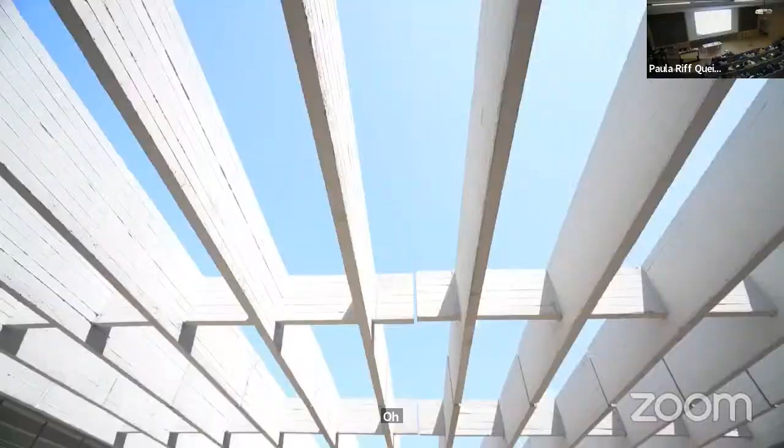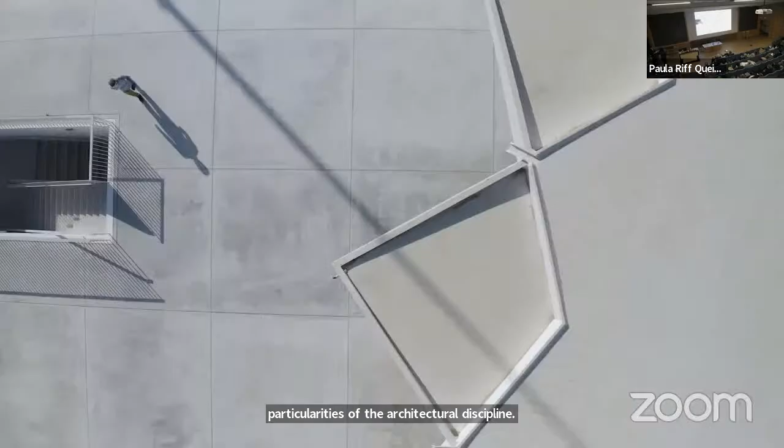What I like about the Aga Khan Award is that it looks at the particularities of the architectural discipline: its formal inventiveness, its spatial dexterity, and its material attentiveness. It's the only award in the world that recognizes architecture is part of a larger net of activities trying to solve the problems of the built environment.

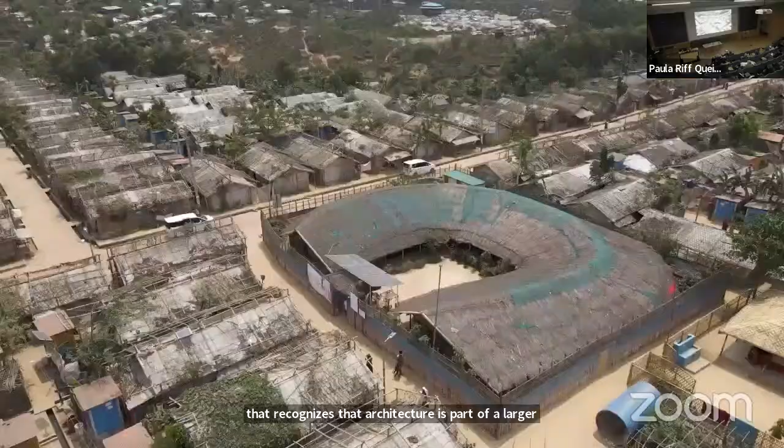It's very important to focus on the people. It is our duty to pay attention to the very philosophy of the Aga Khan Foundation and the Aga Khan Prize for Architecture. What makes it significant is that it's the only award that talks about architecture and development. That's what makes it unique.

The efforts that are made to visit every single shortlisted project, to photograph it, to meet with all the different actors, to acknowledge the complexity of architectural projects, the number of actors involved, and to really see the effect architecture can have. On-site reviews give you a clear understanding of the project. They give you insight into the fiber of the project, what happens under the engine, as it were, rather than what you see on the facades.

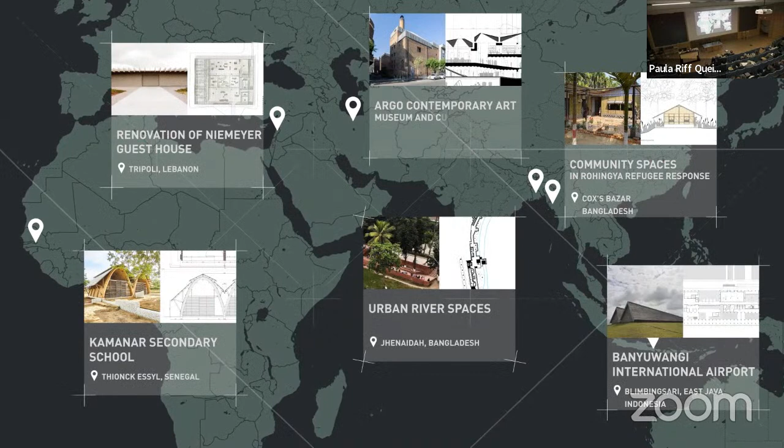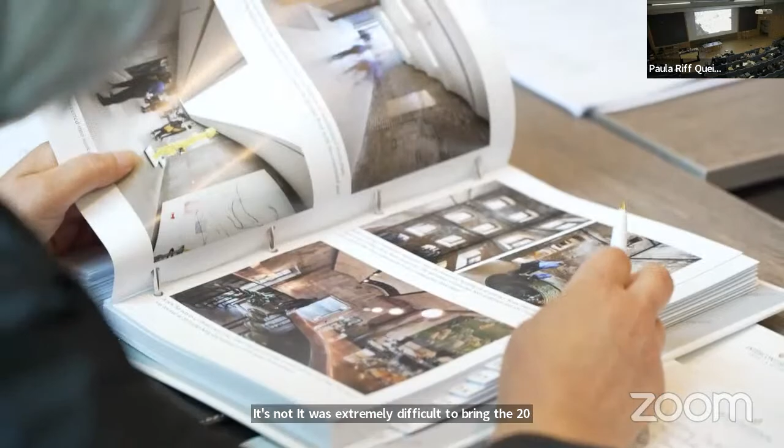It was extremely difficult to bring the 20 shortlisted projects down to 6. All of the 6 have different values. In every cycle, we see different approaches, different selection criteria from the juries.

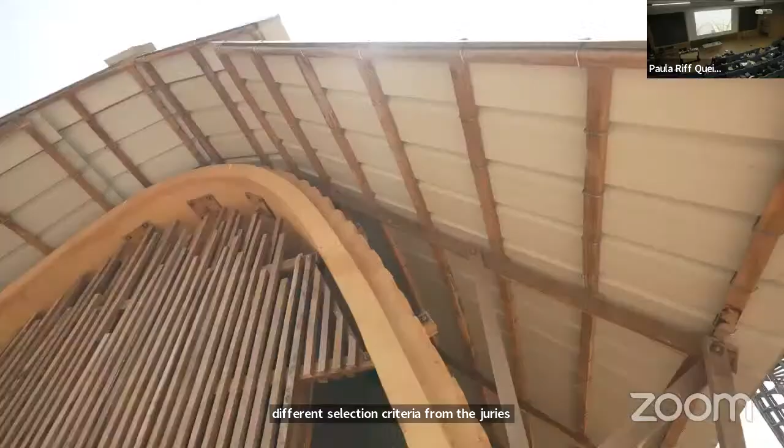It's very interesting and impressive to see how these projects really take into account the daily life, the environment, the existing context. What characterizes the winners of this year's award is people-centered, transformative, and inspirational qualities.

It's more than an award, actually. It's like a fantastic open library that allows us to travel through time, almost like a journey through time, that allows an observatory of the different ways architecture could deal with sometimes very hard geopolitical situations.

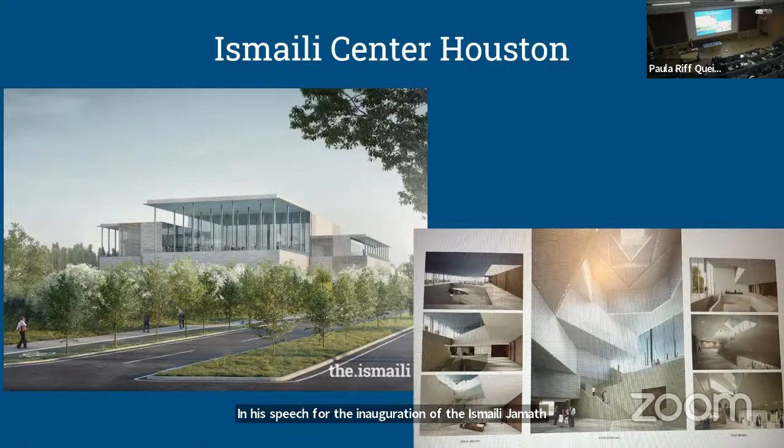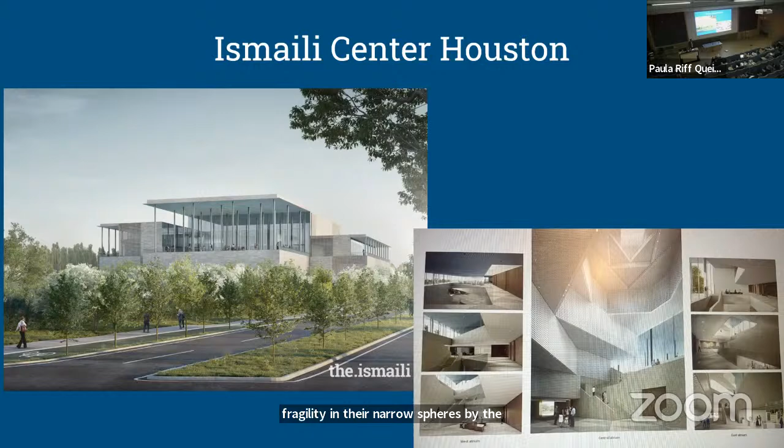In his speech for the inauguration of the Ismaili Jamaat Khana and Center in Houston in 2002, His Highness the Aga Khan said: "The center will be a place of peace, humility, reflection, and prayer. It will be a place of search and enlightenment. It will be a center which will seek to bond men and women of this pluralistic country to replace their fragility in their narrow spheres by the strength of civil society, bound together by a common destiny."

It is already a symbol of the hopes of people who live through change and turbulence and have ultimately found security and opportunity here in the United States. In this time of geopolitical uncertainty, conversations like today's are important, where we focus on what binds us together versus what keeps us apart.

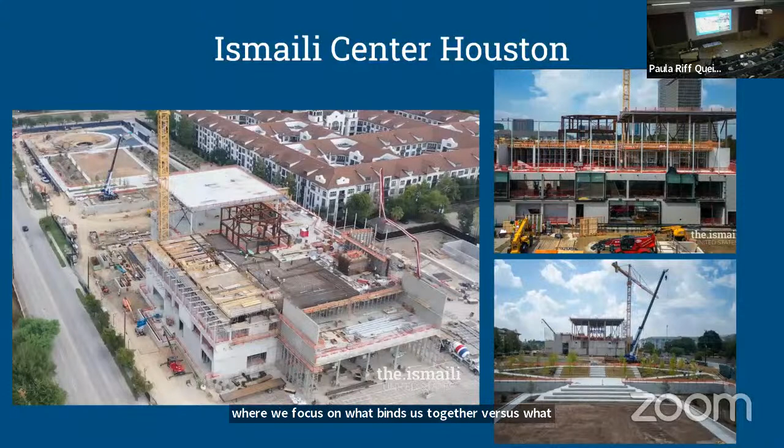Architecture does just that, and I look forward to hearing our distinguished guests reflect on the importance of the Aga Khan Award for Architecture. Thank you.

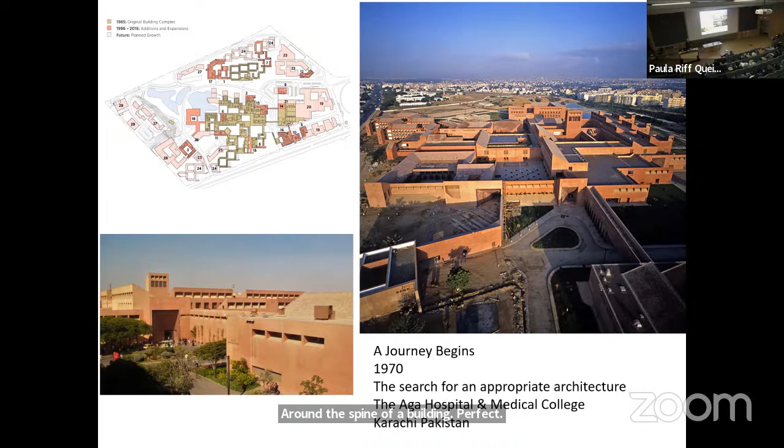So he sets up an award—well, he actually sets up to design this building. In 1970, this project is commissioned to Payette Associates, who then, 40 years later, are still involved in this hospital, which has grown and grown. You can see the master plan of it, and what it is essentially is developing a kit of parts around the spine of a building, and a series of courtyards. These were interpreting, if you like, certain kinds of architecture. I actually joined this project in 1972—this was my first project just after I'd become an architect, so I got involved at a very early stage in England, where it was being designed, and learned a great deal about architecture through my involvement in this piece.

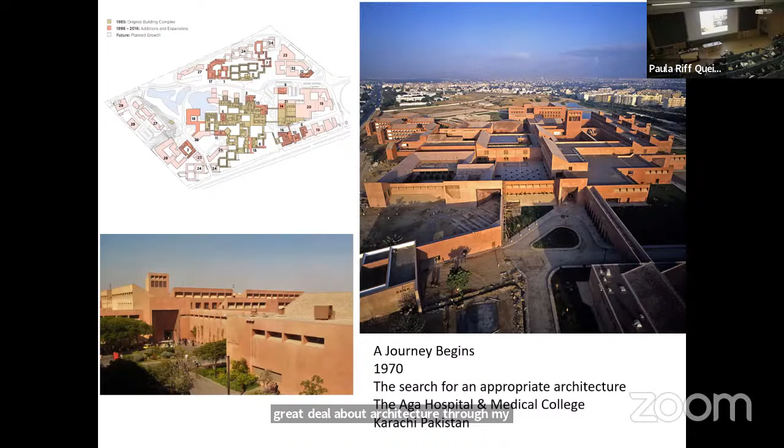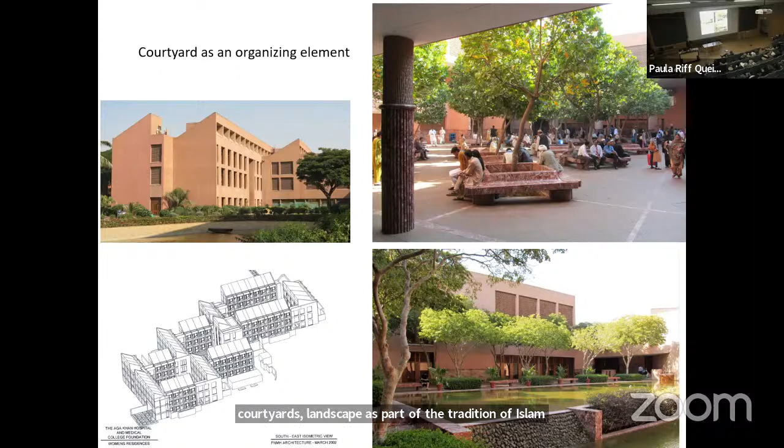The project used the courtyard as an organizing element. It was based on wind catchers almost—you can see the wind catchers on top. A series of courtyards, landscape as part of the tradition of Islam. I believe that this is the piece that started his journey into architecture. It was a modern interpretation, if you like, of the vernacular and Islamic architecture—the major gateway that you come into a place with, as a darwaza, as it's called. The use of materials like marble marked moments of threshold, where you entered a part of the building with devices of this kind.

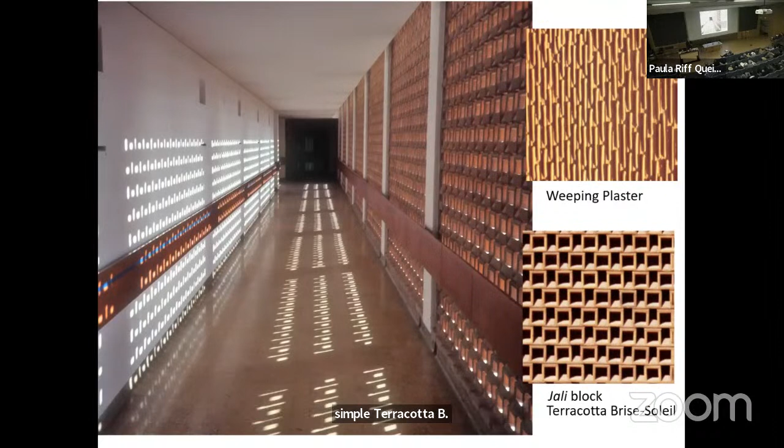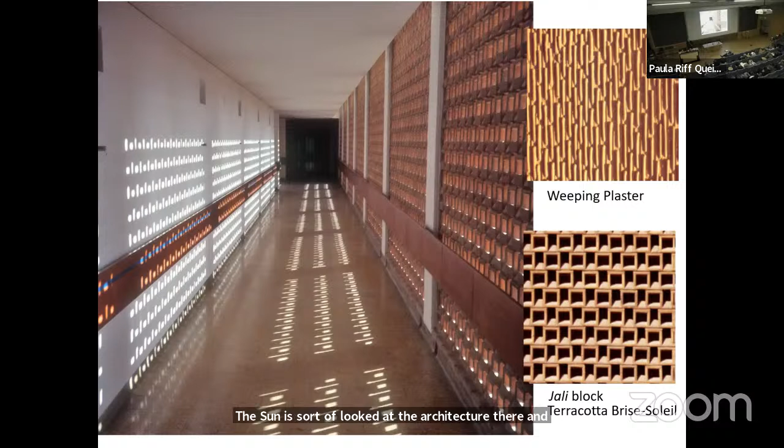Materials that we use range from very rich marble down to simple terracotta brise soleil, which allows the air to pass through. The building was going to be in white. When Tom Payette went around Pakistan into the desert, he sort of looked at the architecture there and said white would be a very stark finish to the building. So they ended up with something called weeping plaster, which he actually saw at some of the vernacular buildings in Sindh, and decided to develop this weeping plaster and these ideas of shade. So it really is a kind of hybrid building, using the vernacular in some ways in a modern idiom.

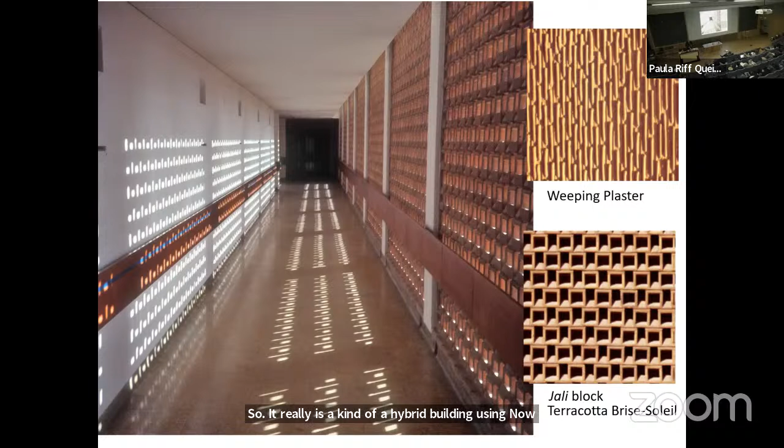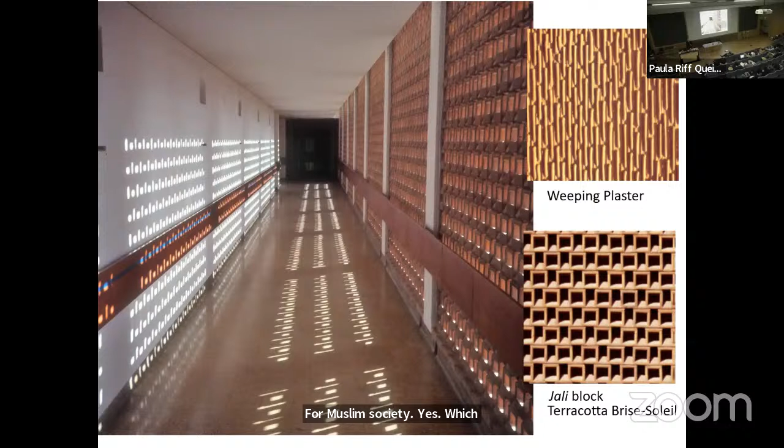He felt there was a need at that time to create a wider conversation about architecture for Muslim societies, dealing with problems of identity. Who were the Muslims? Where were we? What did we do? With the idea that it needed to be a much wider piece.

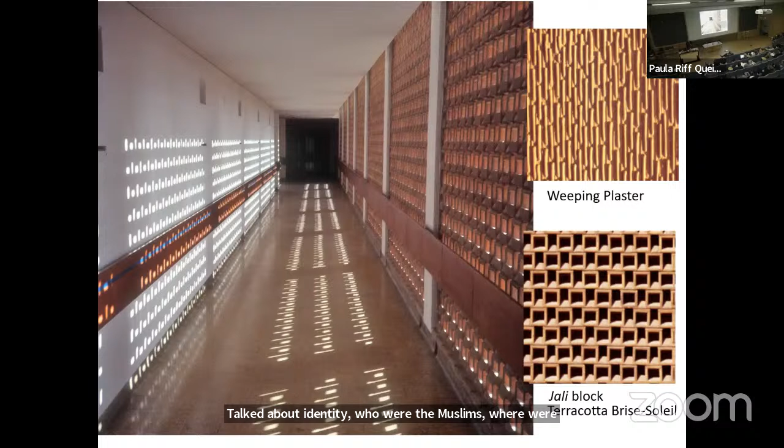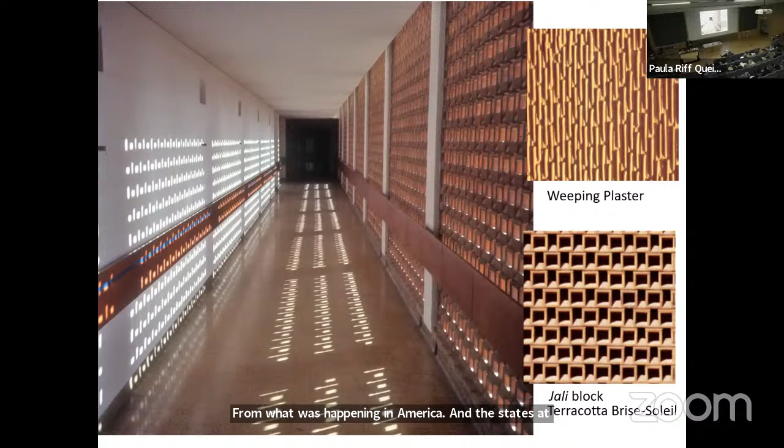So about 1974, he announced the idea of creating an award. He did this in Bangladesh and then later in Pakistan. He said, I'm going to create an award which would start a dialogue and discussion about architecture that was different from what was happening in America at that time. There was a famous New York Five around, Peter Eisenman and company. The discussion was architecture for architecture's sake, perhaps—I'm simplifying it a little bit.

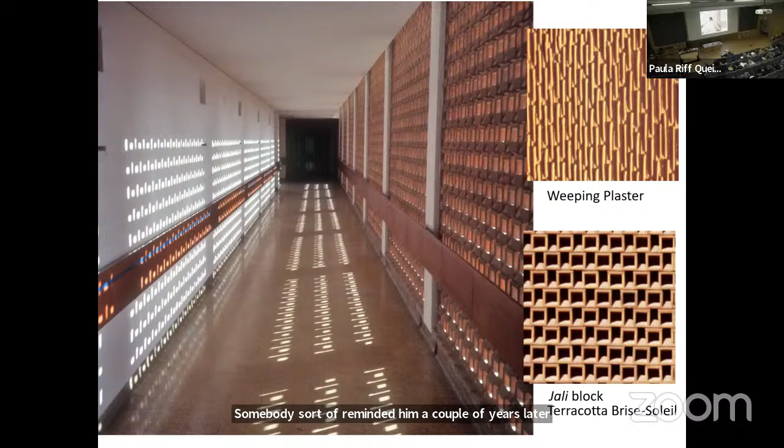But he felt there needed to be a different discourse about architecture. So he said, I'm going to do this award. Somebody reminded him a couple of years later and said, Your Highness, you made an announcement about this. What's happened? And he said, yes, we will do it. He was very serious because he felt he needed to do something different.

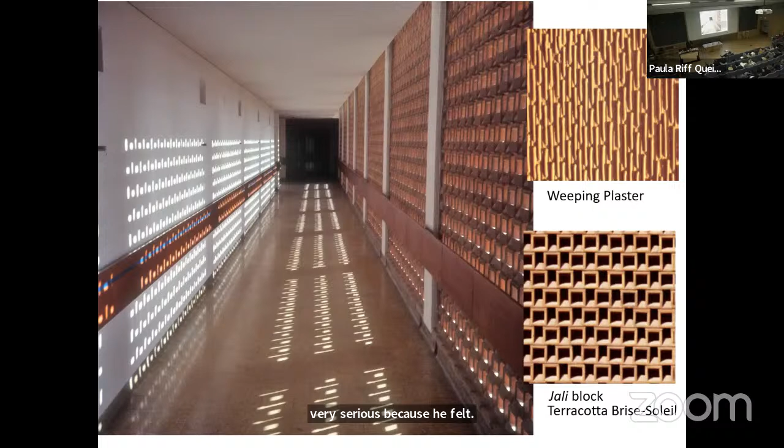The question was, what was going to be the architecture that he was going to support? Was there such a thing as Islamic architecture? An architecture for Muslims? How did it present questions of identity?

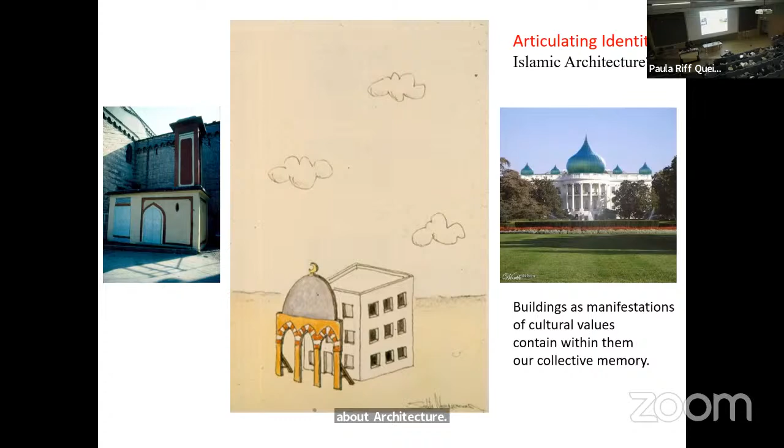In a slightly different way, he thought about architecture, if you like, as a gift. Now in Islam there is a tradition of the gift, but it also places an obligation. This is from something that Michelle pointed out, reminding me of a book called The Gift. It's about a moral obligation to society, which he felt he had, and the hope that there would be a reaction and acceptance of a conversation about architecture. So it's not just a gift, there's a reciprocity expected—not that if I give you something I want something back, but there's this tradition of giving.

It's in the tradition of religious endowments in Islam, the Waqf. It's in the tradition of stewardship in Islam. I really do feel that his ideas of the freedom of the gift and the obligation inherent in it, and his generosity to the general public and people, was one of the things that was coming back to us.

So he created the Aga Khan Award at the end of 1976. It's actually 1977 that is used as the date of the awards, but the first meeting I went to and was involved in was in December '76. I'm not sure it counts, but 77 was the beginning of a conversation. What he did was say, what am I going to do? How do I create an award?

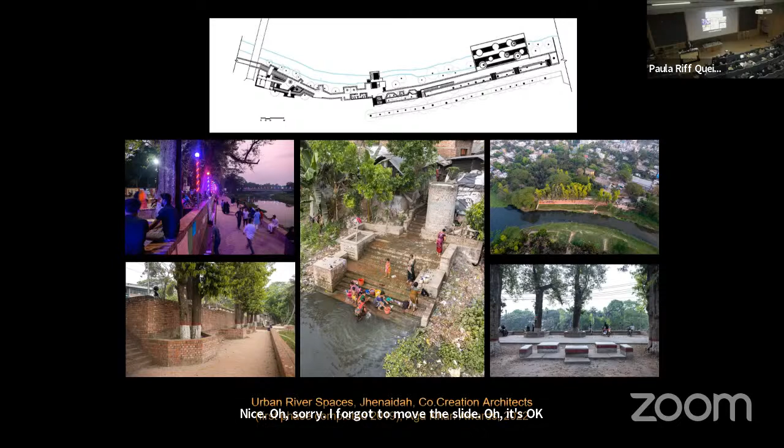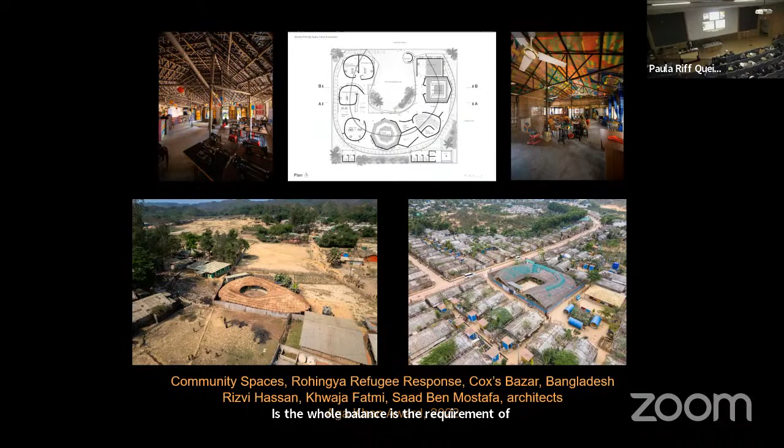Despite the scarcity of funds, nurturing a healthy sense of citizenship in the community, which has been empowered by its direct... the whole balances the requirement of temporariness and safety with sustainability and economy to create dignified, sensitive, and enjoyable community spaces.

Vernacular architecture. Here, this way. Now we need the last one.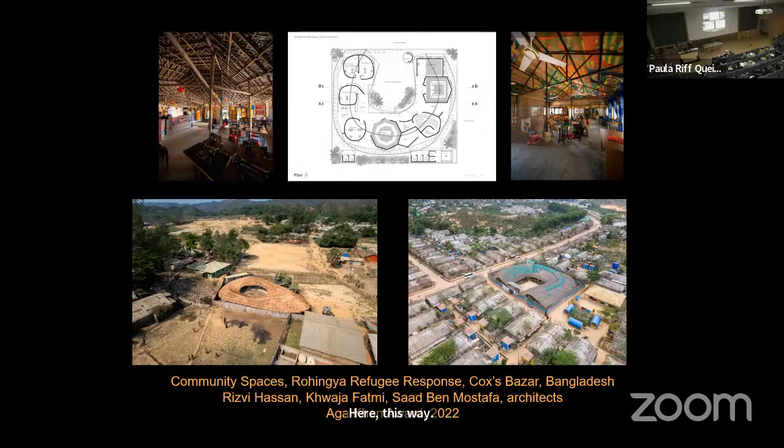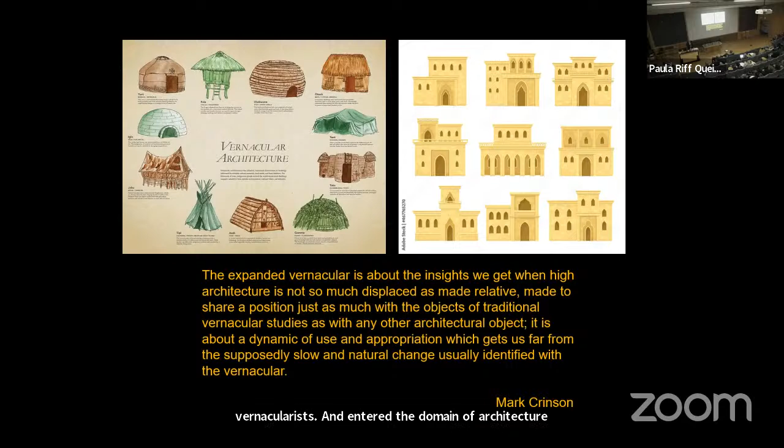Here, okay, we're fine. Vernacular architecture has come a long way since the days it was brandished as a native response to location-blind modernist designs and the bureaucratic colonial and national authorities that imposed them. Along the way, it has shed the naive romanticism that marked its earlier adaptations to contemporary needs and restrictions. It has also transcended the puritanism of earlier vernacularists and entered the domain of architecture as a dynamic design category on par with high architecture.

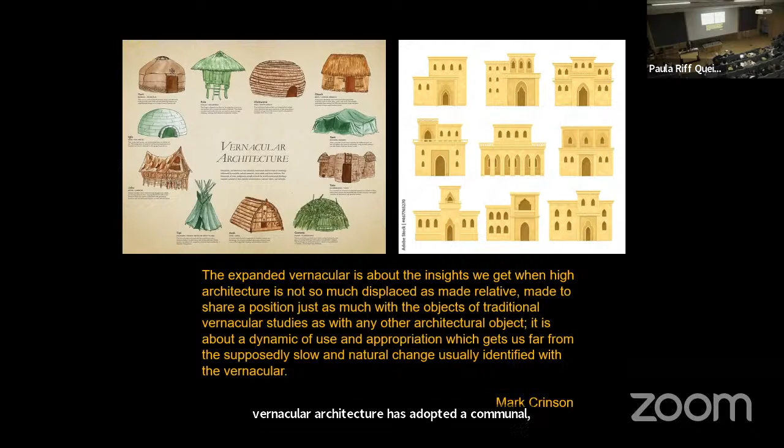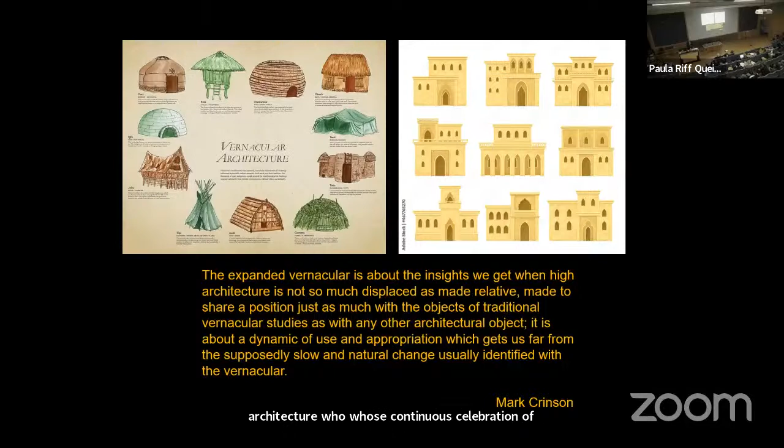As Mark Crinson remarks, but most importantly, vernacular architecture has adopted a communal, dialogic design and building process that involves all the stakeholders. This is, of course, a political dimension that is acted upon by all the architects who partner with their communities. It is also implicitly understood by the Aga Khan Award for Architecture, whose continuous celebration of vernacular architecture has mirrored the evolution of its deployment in various contemporary contexts, both for its architectural nimbleness as well as its expansive civic capacity. Thank you.

Our last speaker is Farrokh Derakhshani, who is the director of the Aga Khan Award for Architecture. He has been associated with the award since 1982, where his work has brought him into contact with architects, builders, and planners throughout the Islamic world. He is actually a graduate of Iran National University and an international fellow of RIBA.

Thank you, Mohammed. Just I have to start with, I've known Nasser Rabbat for 38 years, I think, correct? And in all these years, we've been traveling around the world together, we've been to so many places together, but I could never compete with the way that he so eloquently makes sense out of things. So I always try to undo him in a way, or not. So that's why when he was saying what he's going to be talking about, I said, now what I have to do, I have to switch it the other way around.

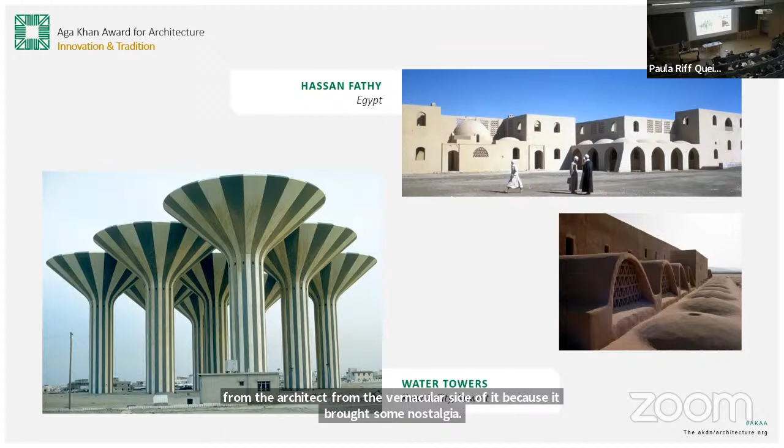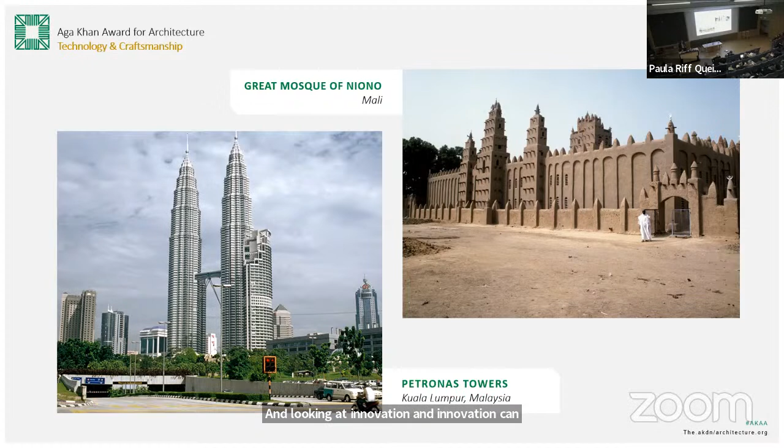So what I want to say is that when you look at a project, you're looking for excellence, and that's how the award has been judged all these years, looking at innovation. And innovation can have all different kinds of manifestations. We're talking about density, high-rise density, housing.

Again, I'm bringing two different projects which were both awarded. It's the Moulmein Rise, a high-rise apartment house done by developers in Singapore. And we've got Shibam, which they call the Manhattan of the desert. It's in the middle of Yemen. This housing, because they have the technology to build houses 7, 8, 9 stories, has been built over the years, and they're actually rebuilt.

When you go there, in reality, none of them are very old. A lot of the buildings are being rebuilt all the time.

But what was interesting in the housing we're talking about, the Moulmein Rise, is how the architect worked with the developer in changing the rules, reinterpreting the rules of the society, having this very narrow skyscraper of just 30, 40 stories. But he brought in some elements of the traditional or vernacular architecture of the area, which he introduced in this high-rise.

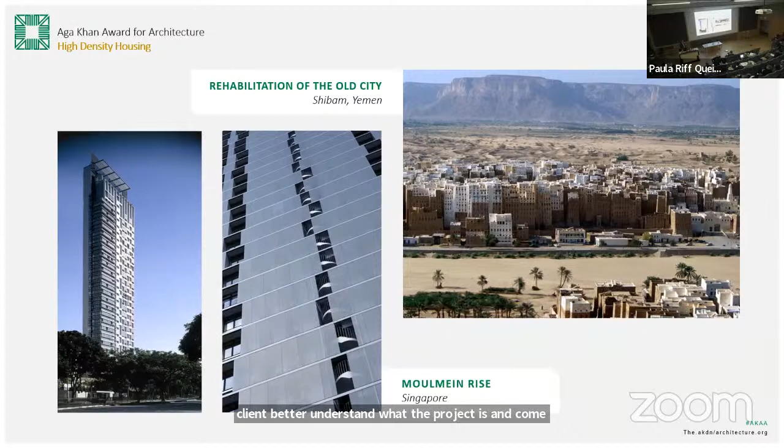It comes to private houses, again, vernacular, as Nasser said. This is Al-Wakil, who was the disciple of Fathy. But what we're talking about is that both of these buildings are built in villages. One is done in Çanakkale, Turkey, by Han Tümertekin. An extremely interesting contemporary building, which was called a building with 5 facades, because the roof is also seen as a facade.

How this was implemented in a village in Turkey, and how private houses... because when you talk about community architecture, it's not only about community. Architecture is not only that you have to serve the poor. You have to be able to serve any client in the best way, even if it's a weekend house for a rich Istanbuli businessman or someone else. It should be seen the same.

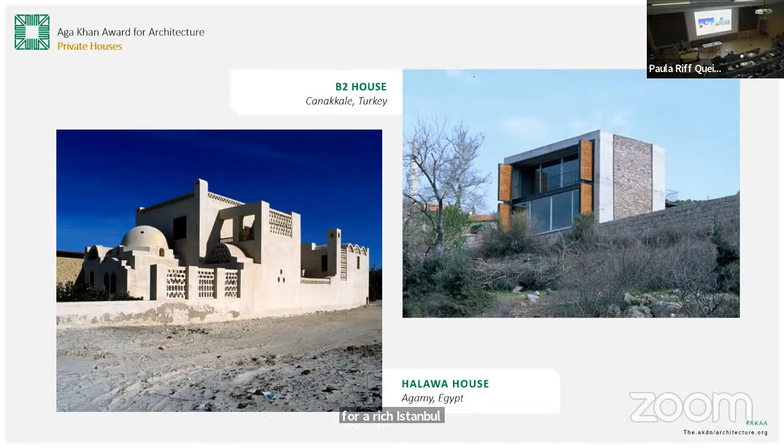When we're talking about here, Nasser explained the primary school in Gando, that was in 2004. But much before that, the award recognized how you use green buildings.

I don't like the word green buildings, but that's what Ken Yeang in Malaysia started. That high-rise office building for IBM in Kuala Lumpur, Malaysia, in Selangor, used energy in an innovative way - one of the areas we were discussing in the studio today, how to best use energy.

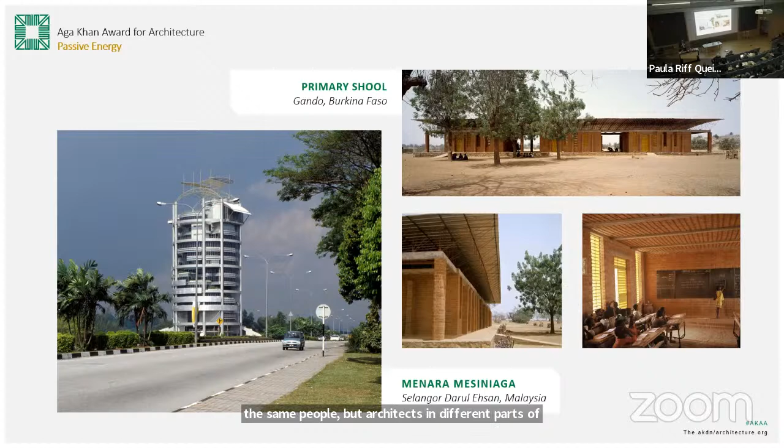Here in 1995, we recognized this, one of the first of its kind in the world. So it's not always what we learn from the West being used in the South. These developments go together - experience done by the same people, architects in different parts of the world, all contributing to what today we have as our discourse. The same thing about landscaping and climate.

Today, climate is a very important aspect for us. We're all talking about buildings and projects dealing with climate. Here we had a very interesting project in Turkey.

In 1995, we had Charles Jencks on our jury - I don't know if some of you have heard his name. We received a nomination for a reforestation project at the Middle East Technical University in Ankara. While we debated whether this project was eligible to become architecture, we presented it to the jury. I remember very well, it was Charles Jencks and Peter Eisenman together on the jury, and they gave an award to this project.

It was a reforestation project, and it explained how reforestation is an act of urban planning and urban design, how you can form your cities. If not, encroachments would come and take all this land - especially in Turkey, they built houses, etc. This reforestation has helped Ankara's climate a lot.

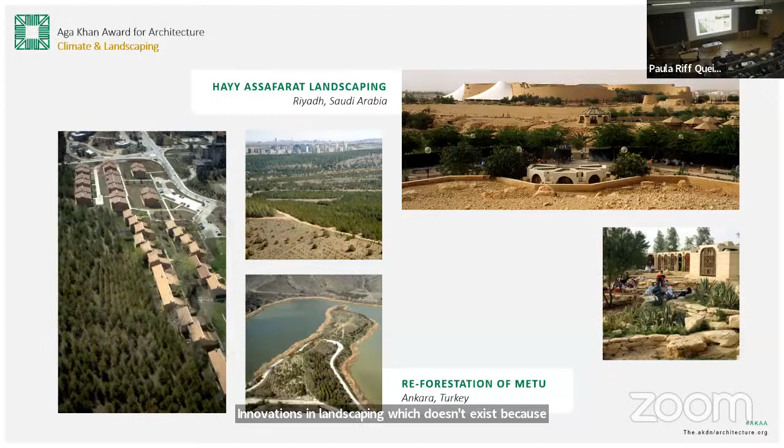At the same time, there were some innovative ways of doing dry landscaping. In Riyadh, there was a project which got an award in 1995 as well. It was about dry landscaping and innovations that don't exist in the West - most of the West is green, they don't have any idea of dry landscaping, and that experience was done very well.

The last thing I'm going to talk about is heritage and conservation. In this cycle, we've looked a lot at heritage - conservation and restoration of buildings has been done forever. It's very important because it reinforces the identities of each society, as people also value projects which are restored. It helps the identity of those cultures.

But now what we have given awards to this time - two awards - is about recent heritage. Recent heritage is as important as older heritage, because historically it doesn't matter if a building is 1,000 years old or 100 years old. What matters is what it has to do with our heritage, how we look at it as part of our identity.